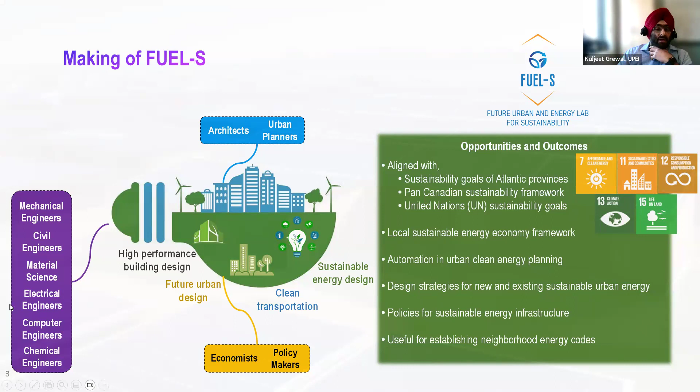So these are some of the things, and this is the vision of my research lab: real life adoption of sustainable energy infrastructure, promoting clean energy storage, economic and environmental goals, attaining energy security and affordability. These are some of the things we are doing.

We are dealing with energy efficient mixed use buildings. By mixed use, I mean whether it is residential, commercial, institutional, what sort of building is it. And then energy oriented urban planning, how we can do urban planning from the energy perspective, and how we can mix different energy resources together.

And then mixing synergy between existing and new neighborhoods. The space of energy is so dynamic - every day new innovations are coming up and the field is so dynamic. So we are also adopting all those new energy resources as well.

Weather uncertainties, we are quantifying that as well. Techno-economic, social uncertainties, local energy economy, and co-creation - we are insisting on co-creation because net zero transition is not only attained by research. Ultimately we have to engage the community in the journey from an early stage, and I will be talking about it. That ultimately fosters a living lab kind of culture that we are developing here in PEI.

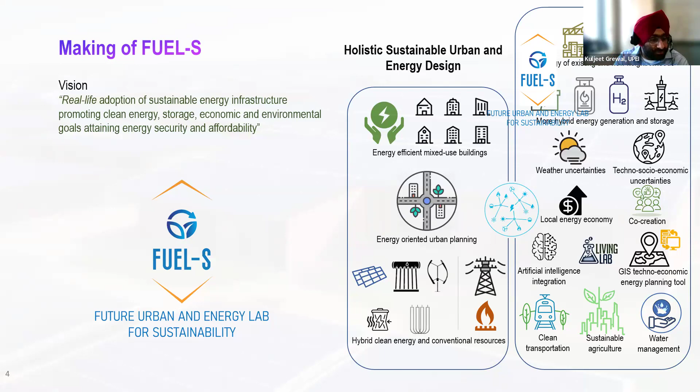We also did one project on clean transportation as well. Water management is also going forward as an overarching goal, and one project is running on sustainable agriculture. So this is the overview of the group activities, that is what we are doing.

Specifically, one of the major focuses is on urban scale sustainable energy design. I'm going to talk first about what this means actually.

When we consider any building, whether it is residential, commercial, institutional, or industrial, these are some of the key aspects when it comes to energy demand profile. The energy demand of any building will depend on the shape of the building, layout of the building, the energy system you are using - whether heat pumps, oil furnace - what sort of energy system, and whether the building is new or existing, because that will govern the building envelope, like the wall insulation value, roof insulation value, and the type of use.

For sure, the energy profile will be different for a residential building versus a commercial building - the profile of energy consumption. And then the facade design - facade is the envelope or outdoor surface of the building. What type of facade design is there, what type of windows and doors are we using? So at building scale, these parameters will affect things.

For example, if you want to attain a net zero energy building, then primarily you will be considering all these aspects, and then you will plan your sustainable energy resources or sustainable energy decision making accordingly.

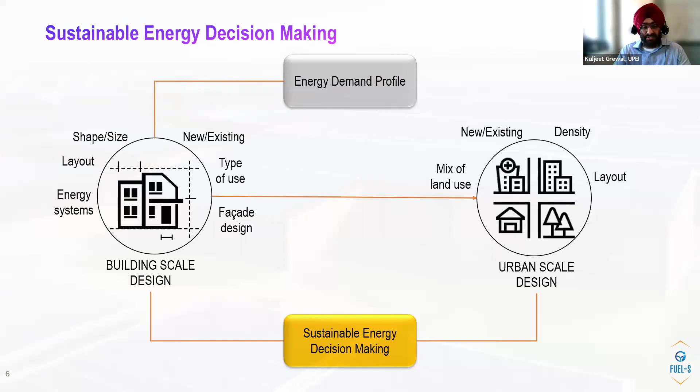What is the density of buildings? This refers to whether our neighborhoods are scattered or more densely populated. For example, downtown would be a perfect example of a densely populated neighborhood, while some suburban areas are more scattered or low density. This will also impact energy demand profiles.

Then there's the layout of the neighborhood. For example, if most buildings are south oriented, or have big windows facing south, those buildings will be heated with solar energy, reducing energy demand. So consider a street layout and how buildings are organized or situated with respect to that layout, whether north, south, east, or west orientation. That will also impact energy performance.

In a nutshell, at the urban scale there are a lot more variables, but there's one advantage. When considering building level energy planning, you're looking at limited energy resources—maybe you can only install PV or solar thermal on rooftops, or have local energy storage integrated with the grid. But at the neighborhood scale, or when considering a cluster of buildings, you can diversify these energy sources further. For example, you can consider wind energy, which isn't feasible at the building scale, but becomes an option at the cluster scale.

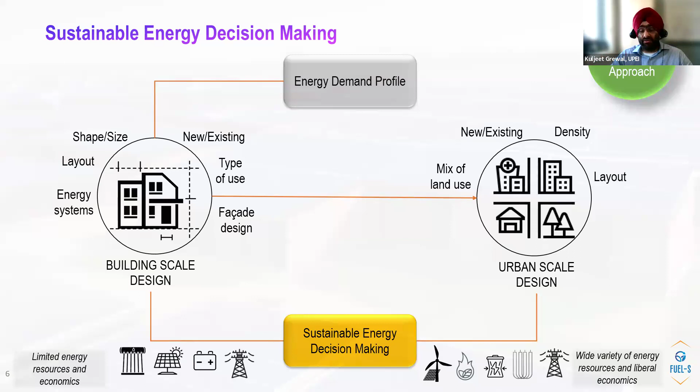So in a nutshell, the point is that whenever you go from building scale to urban scale or bigger, you have a lot more choices of energy resources, and also more liberal economics.

What I mean by liberal economics—this is from a recent report published in 2020 by NREL, the National Renewable Energy Lab in the US. They compared the cost of various solar energy solutions. For example, if you're only considering it for a residential building, if you own a building and put solar on your rooftop, this is the cost you're looking at.

If you come to utility scale or bigger, when considering a building stock or multiple buildings, the economics are much more liberal—almost less than half the cost you'd incur at the residential scale. So by enlarging your scale, you ultimately get less cost for your energy installation, making the economics more liberal for implementing clean energy solutions.

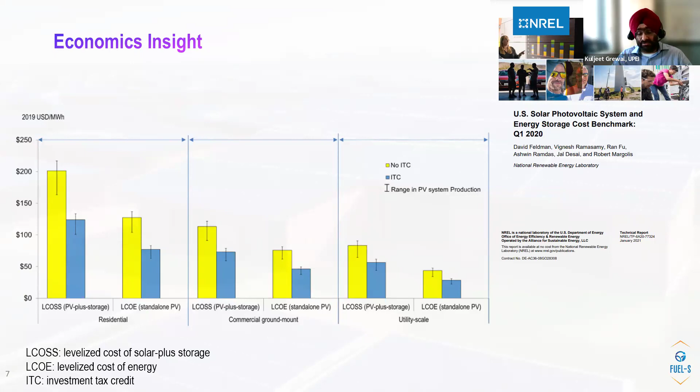So these are a few sustainable urban design objectives. The first objective is energy efficiency of buildings and their systems—this is the primary thing. Often when we hear about net zero, we think about solar energy, wind energy, or bioenergy, whatever generation method. But it's not only about the generation side of things.

We can generate energy for sure, and it should be clean. But at the same time, we have to ensure our buildings or built environment are efficient enough so we're not pouring heat into a house that's leaking heat or has poor insulation. All the heat we dump in would otherwise be lost.

So the primary thing is to make our buildings efficient first. We can do that by using a high performance building envelope, better insulation value, and incorporating passive design—similar to what I discussed before, like having a south facing window in the house to heat it with solar energy.

For instance, in my house, my living area has a big window facing south, and in the afternoon we never turn on the heat pump on a sunny day, because it's more than enough to heat the space while the sun is shining. This way we can cut down the cost—it's not only about active generation—and we can have efficient mechanical systems like heat pumps.

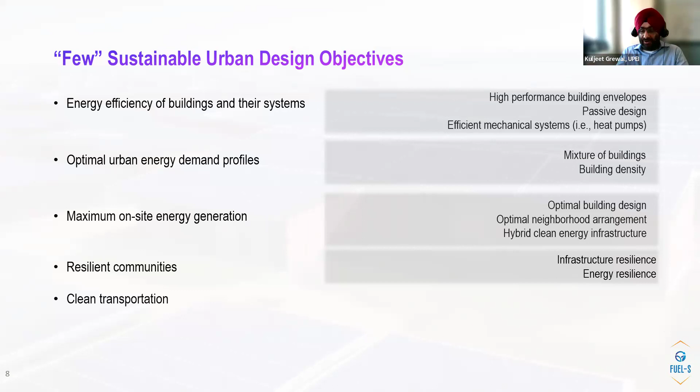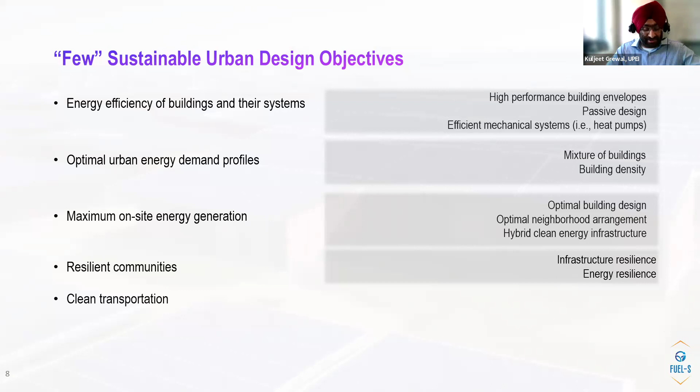And then resilient communities, energy resilience and infrastructure resilience. This is pretty important for Atlantic Canada, especially when we are experiencing a lot of extreme events, like we had Fiona last year, which was devastating with all the power outages. In some areas in PEI, we lost power for around 3 weeks, and it's pretty substantial to manage our day-to-day life activities. So energy resilience and infrastructure resilience is also one of the key aspects.

And then low emission transportation. EVs are there, but EVs are not the sole solution for transportation. There should be alternative methods, like Toyota working on hydrogen engines, ammonia being seen as fuel, or also ethanol and other alternatives. So it's not only about EVs, but diversifying in that space as well.

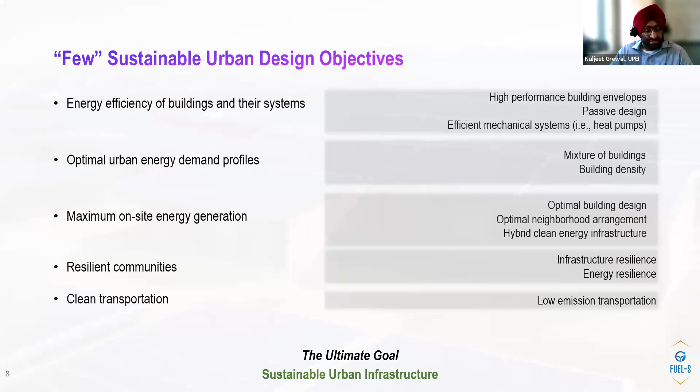So the ultimate goal is sustainable urban infrastructure. Whatever feeds into sustainable urban infrastructure has to be tackled to achieve net zero. Specifically for building stock, when we are considering buildings, there are several variables that can influence the energy of your home or any building.

For example, building envelope performance. The envelope is all the outer elements of your house, like your outer walls or your roof. Your windows and doors are also building envelopes. How insulated your walls are will affect your building performance, and whether you have double glazed, triple glazed, or single glazed windows will impact your energy performance.

And then there's detailed geometry, location, and orientation. As I was talking about, what is the orientation of the building, what is the floor area, whether you have 2 floors, 3 floors, or a single floor. All these things will matter.

And then operational profiles, how you are occupying the building, as I was comparing commercial buildings and residential buildings. So what are the operational profiles, how you are consuming and generating energy, what HVAC system you are using for heating, ventilation and air conditioning, what sort of ventilation, and internal gains like what appliances you have. For example, if a computer is running right now in my office, that's an internal gain.

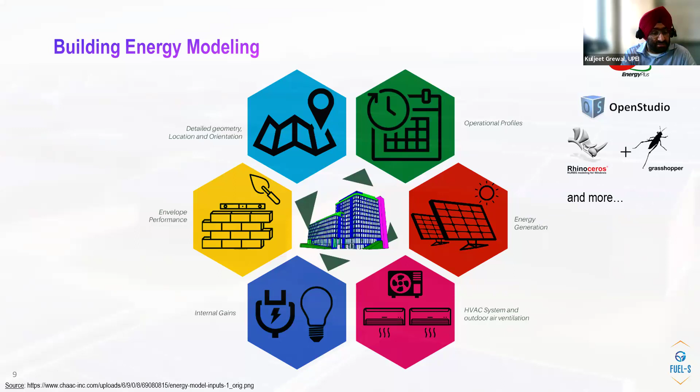Then there are other software packages like OpenStudio, also from NREL, and Rhinoceros Grasshopper, which is also a very good tool that is recently popular in this space. There are for sure more tools out there, but these are some of the key tools in the space of building energy modeling.

So why building energy modeling? Building energy modeling has multiple benefits. It can be used for policy analysis, financial incentives, retrofitting. From energy modeling you can easily see what sort of retrofitting your building will be needing, predictive control, maintenance, and code compliance.

So now NECB, National Energy Code for Buildings, is out there, and you can check whether your building is complying with that code. Asset rating is there, architectural design—these are multiple benefits.

LEED is also one of the benefits. LEED is kind of a certification, Leadership in Energy and Environmental Design. Most commercial buildings are interested in having this certification since it can increase asset value, and they consider a couple of sustainability parameters, so energy modeling can feed into that LEED certification process as well.

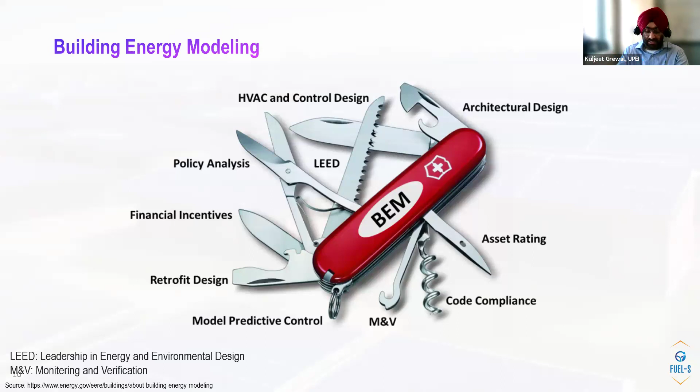Now I talked about building energy modeling for one building, where we're setting up parameters like envelope or energy system. Now when we increase the scale to a neighborhood—let's say you have single detached houses, a primary school, a small restaurant, standalone retail, a supermarket—this is a mixed-use neighborhood, as we typically call it in architecture or urban planning, where you have different building use or land use.

In this case there are a few challenges. Now that you've increased scale from a building to a neighborhood, it's more complex to set up and more time consuming. You're taking too many parameters into account—maybe one building will differ from another. For example, the insulation value of one building won't be the same as your neighbor's, right? So there will be a lot of variability in the building stock you have to account for.

There's also a lot of schedule variability—maybe some people work night shifts, some work day shifts—especially with residential buildings and energy systems. So there's diversity of energy systems: some use wood-fired heating, some use furnace oil, some use heat pumps, some use electrical water heating, some use oil or propane water heating. There's so much diversity in energy systems, and the internal loads will also be different.

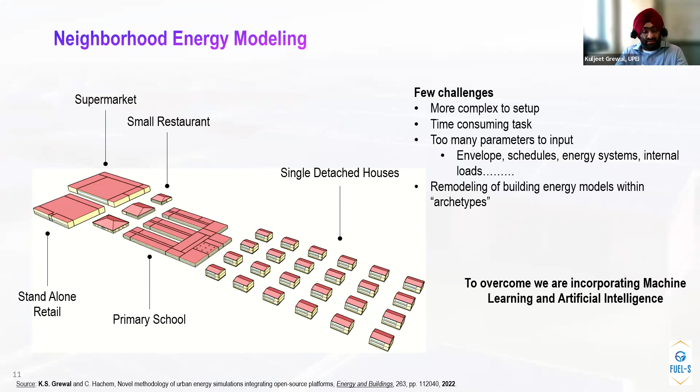That's why in our field we are incorporating a lot of machine learning and artificial intelligence. I want to automate this process down the line so that modeling can be done at a faster pace for net zero transitions.

This is one example we recently completed, published in a reputed journal of energy and buildings in our field, where we developed several archetypes of buildings. We coupled different tools like SketchUp, Energy Plus, MATLAB, and Python together to automatically create 3D models of buildings or set up 3D energy models.

So first in this method, we individually set up building energy models, then feed them into this algorithm, which takes all those energy model files and merges them together to create a neighborhood energy model. Although I'm describing it in simpler terms, merging is itself a very complex task because of the variety of variables involved. Anyway, to tackle this problem we built this algorithm, and it works pretty well.

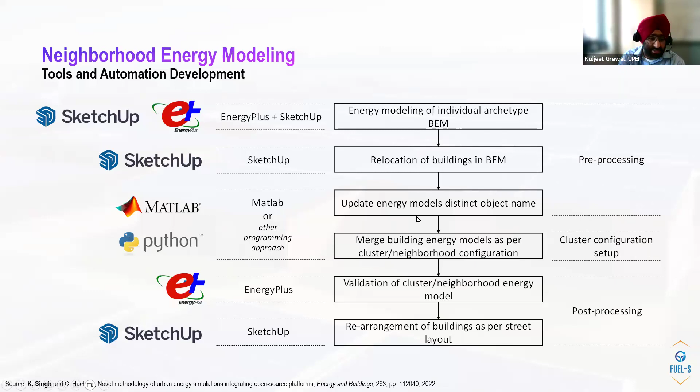And then this is the mixture of buildings that I was talking about. So for example, here in this study, we have studied how the mixture of residential buildings will impact the energy performance. So in Canada, primarily, we are having three types of buildings: single detached, townhouses or semi-detached houses. All the townhouses are a little different, but in this study, we have considered them in the same space. And the apartment buildings. So these three are the main types of buildings that we are having.

And then what is the commercial to residential floor area ratio? So in this particular study, we have considered a mixed use neighborhood where partly the neighborhood is developed as residential and partly it is developed as commercial. And then what is the unit density index? Like how many units are there per acre of land or per hectare of land.

And then these are the performance parameters that we have considered. We have considered net electricity consumption ratio of performance, like what we are generating and what we are consuming. And then we have assumed PV generation as well in the study on the buildings, and waste to energy. We also considered this waste to energy generation. And then what is the GHG emission that is coming out of this mixture.

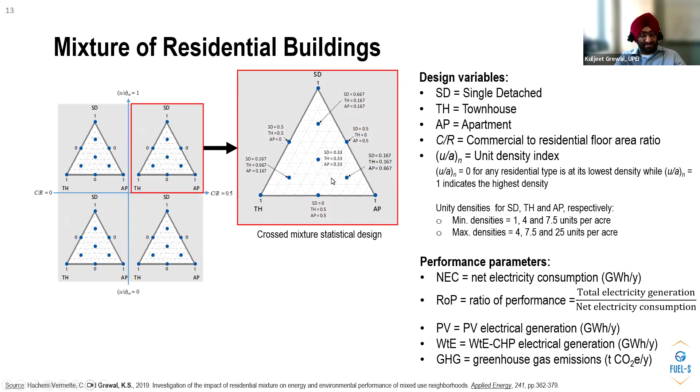For example, here, if we are having 100% single detached houses, here if we are having 100% apartments, 100% townhouses, and in between there will be a mixture of all these types of residential buildings. For example, at the center, there will be an equal mix of each building, basically 33% single detached, townhouses and apartment buildings. And then we have set up a couple of objective functions with respect to these design variables. And then we fed it to a multi-objective optimization engine so that we can see how the mixture will look.

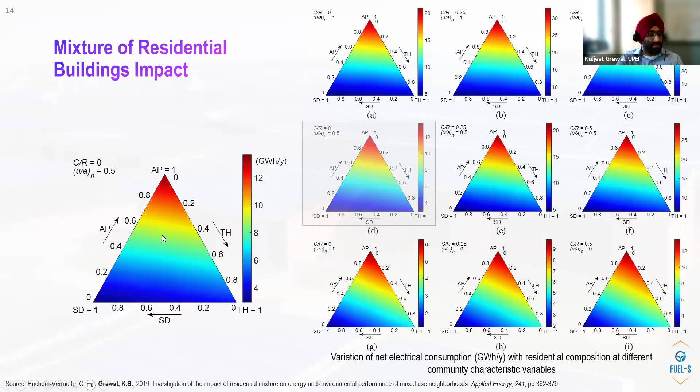So these are some of the results that we got. For example, in this case, you can see how the mixture of different buildings together will impact the energy performance. And this is net electrical consumption; since apartment buildings will be having multiple units, these are more energy intensive units out there. And then whenever we are moving around within this triangle, we can see how the energy consumption will be varying. And similarly, we have done this with commercial buildings. If we are mixing together commercial buildings, how does that impact the energy performance?

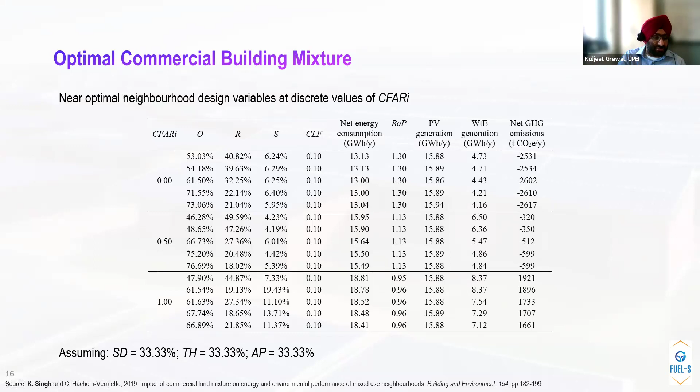And then finally, how we can mix different buildings together, for example, to achieve net zero or to optimize all these design parameters. And so in that way, we can see how well we can attain net zero energy in future neighborhoods. So this is also one of the ideas that we are having, so that buildings can be mixed together to attain net zero.

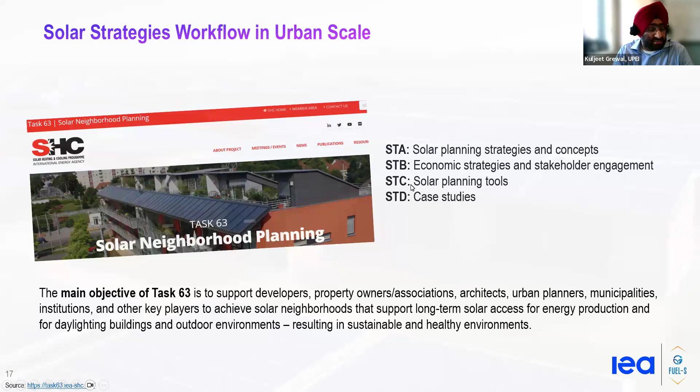This is also one of the pieces of my research, which is towards solar neighborhood planning. This is Task 63 of the International Energy Agency, where we are having different subtasks. So I'm co-leading Subtask A in this task of the IEA. And for Canadian neighborhoods, we have developed a couple of real life archetype energy models. For example, these are two neighborhoods that we selected.

And then we have energy modeled these neighborhoods, and then we have analyzed them from the solar perspective, like how much active solar we can generate, what is the passive performance, and based on that, how we can install solar collectors or do solar installations within the neighborhood. And then we also tried retrofitting these buildings, for example with more insulation and stuff like that. So this is the baseline, 100%. Then how much we can reduce with energy efficiency retrofitting, and how much we can reduce with retrofitting and solar energy generation, basically.

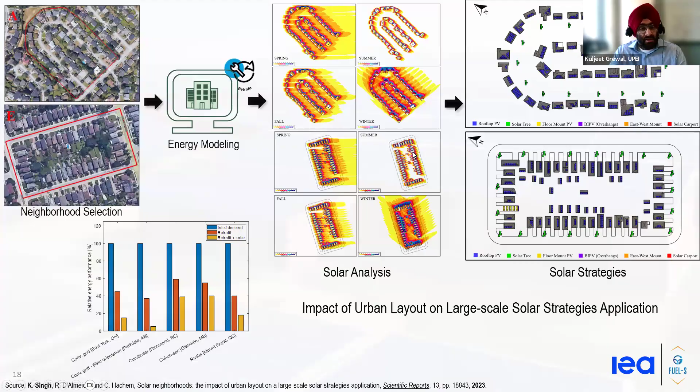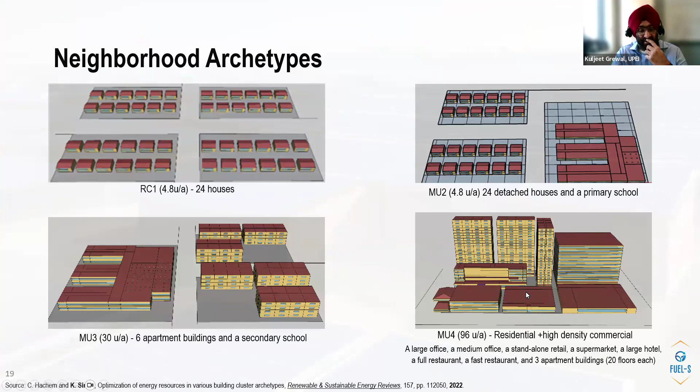Then as part of the task, we also developed a couple of neighborhood archetypes within Canada. For example, here I'm showing residential archetypes, mixed use archetypes, high density archetypes, just like downtown areas. And then we have also used a genetic algorithm to optimize the mix of energy resources. Here we have optimized wind, PV, waste to energy, and grid together, like conventional resources and distributed energy together, to attain net zero energy, basically.

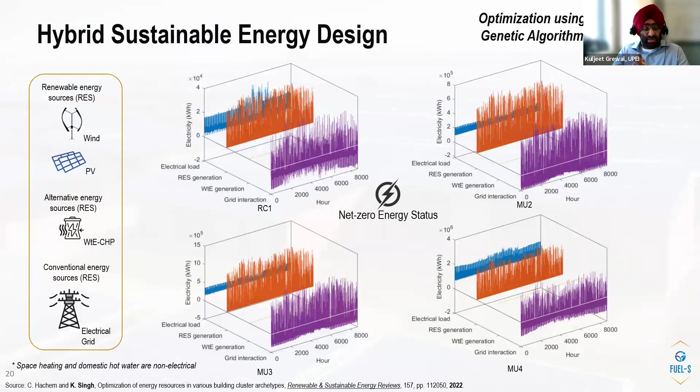And then this is another elaboration on the IEA task activities, but this is not part of the IEA task. We have elaborated this research further, where this is the mixed use neighborhood that we have set up, and then we have quantified its electrical vulnerability. We want to assess the energy resilience of these communities. For example, if some power outage has happened during some extreme event, how energy vulnerable are those net zero neighborhoods? How much solar energy we can generate, how those neighborhoods can survive, basically.

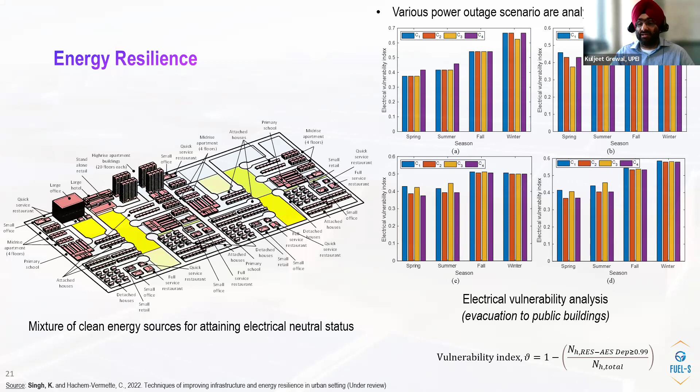So this is also a perspective, and we have set up a vulnerability index, and based on that index, we have quantified different neighborhoods in different seasons and how they are vulnerable. And then we can take this vulnerability index and try to optimize the design of our hybrid energy infrastructure to minimize this vulnerability. That is also one of the pieces that we have done.

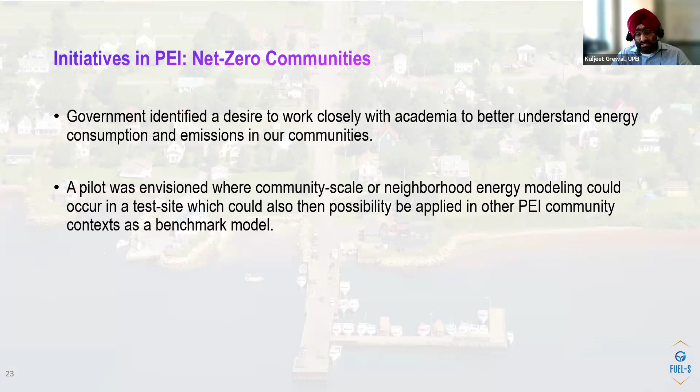So coming to PEI, in PEI also we are having a number of initiatives. One of the initiatives is the project that I'm going to touch on briefly today. But overall, the province wants to attain net zero by 2040, and there are a couple of initiatives, a couple of funds, and a lot of exciting things are going on in the province. So the government also identified a desire to work with academia to better understand energy consumption and emissions of the communities. So this research is part of the community energy planning of Prince Edward Island.

And so they reached out to us, and then we planned this project on Georgetown, PEI. It's a small town here in PEI, having around 300 buildings, so it is a scaled size. This project is on assessing the potential of PEI's first net zero community. That would be potentially Georgetown. And this project kicked off on October 5th. And then this is the overview of the project.

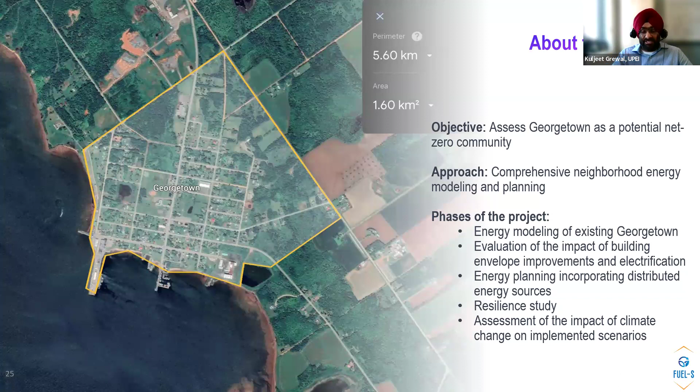Then phase 4 is on resilience study and assessment of the impact of climate change on the implemented scenarios. For example, going forward, if climate change keeps on happening, then what we are designing today may not be sufficient for tomorrow, down the line, 10 years, 15 years, right? So we want to study that as well, how our energy systems will be impacted by climate change.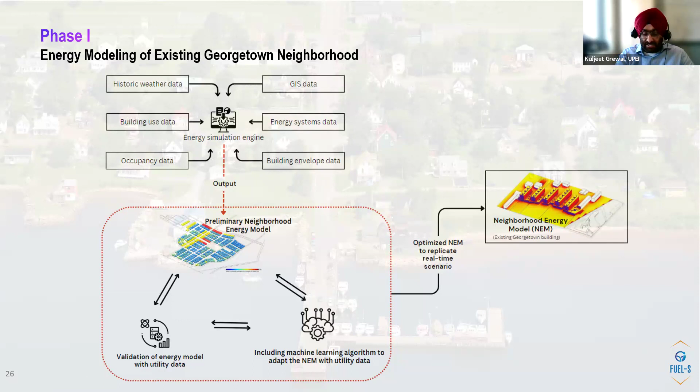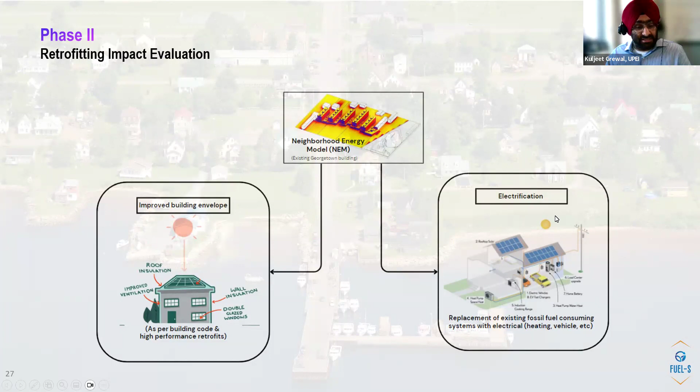So this is phase 1. First, we are getting historic weather data, building use data, occupancy data, building envelope data, energy system data, GIS data. We are integrating all these data sources to set up a prelim neighborhood energy model. Then we will calibrate this model with utility data with the help of machine learning. We want to have a kind of digital twin of Georgetown as a baseline case. And then we will be assessing retrofitting strategies: if we are retrofitting buildings, how much energy we can save, how efficient buildings can be, and what is the impact of electrification as well.

So I'm very proud to announce that we are on the path of fostering Georgetown as a living lab. Why is it a living lab? Because it's a real life context, and we are collaborating with the community, with government actors, with private partners, and ourselves, an academic institution. We are having a lot of community engagement. Till date, we had 3 sessions in the last 3 months. We have a couple of volunteers in the community as well. We are collecting real life data. And of course, scientific research is one of the pieces in the project as well. So that's why we are now co-creating a net zero community in Prince Edward Island, and it's a living lab.

So we are involving people in data collection as well, so I will be touching that up as well. So this is the research progress till date on this particular project.

So we are playing with LiDAR data from the province. LiDAR data is a laser data that is collected from an aircraft. It is a very scary kind of data set if you look at it, but you will be having a lot of points of all the surfaces on ground. So we are processing all that LiDAR data, and now we are able to attain an LOD2 model, level of detail 2 model. So this is the model that we have developed from LiDAR data.

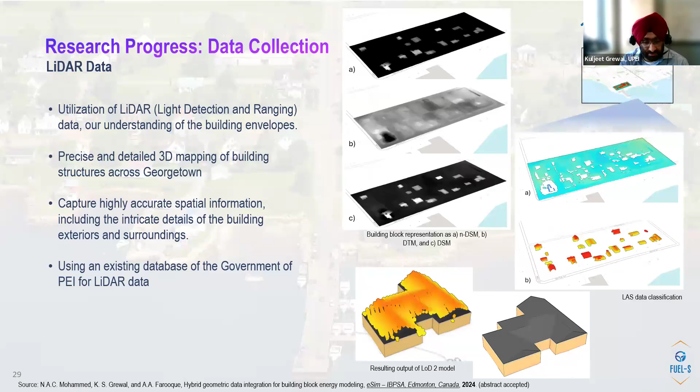So to tackle that problem, we are flying our own drones in the community as well. We are processing that data with machine learning. We are labeling that data, and then we are deploying supervised machine learning to detect windows and doors. Then that data will be superimposed onto the LiDAR data model that we have developed, that you have seen in the previous slide.

So from that, we are envisioning to automate this process so that you are only inputting LiDAR data and a couple of images of the neighborhood. Then it would automatically generate 3D neighborhood models for you. Right now, people are doing this process very manually, but we are heavily automating it. And this is not only relevant for PEI, but for the whole world.

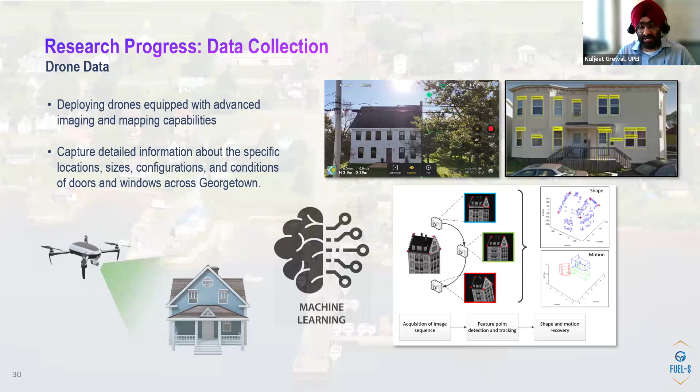One of my colleagues from Norway, who is also working on the IEA task, wants to use this technology to develop 3D building models, because right now the process is pretty much manual. We are also having building envelope data from NRCan, Natural Resources Canada, and recently we started browsing this data, because NRCan is also doing energy audits through their EnerGuide program.

From this data, we discovered that there is a lot of variability in envelope characteristics. For example, this is your wall insulation value, and you can see that from the year of construction, you can't really assume an insulation value, because there was no building code followed in PEI before 2020. So due to this variability, we can't just first identify the year of construction and then assume the insulation value.

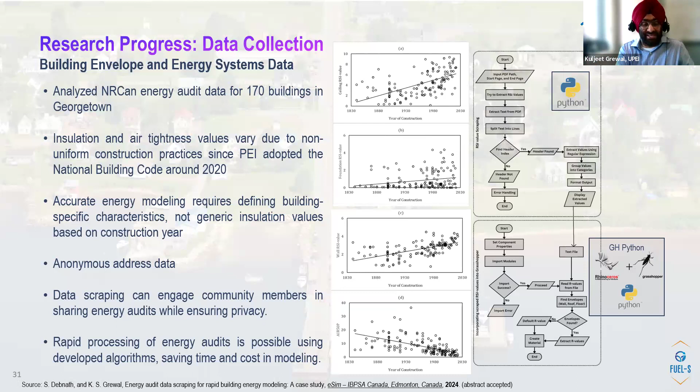So that's why we plan to diversify this building envelope characterization process. For that, we are using energy audits from NRCan. Another problem with the energy audits is we don't have address identities in that data, so we don't know which building. In that energy audit, you will see insulation values and what the energy system is, but you can't see the address because of privacy. They are not sharing that data with us, so that data is anonymous.

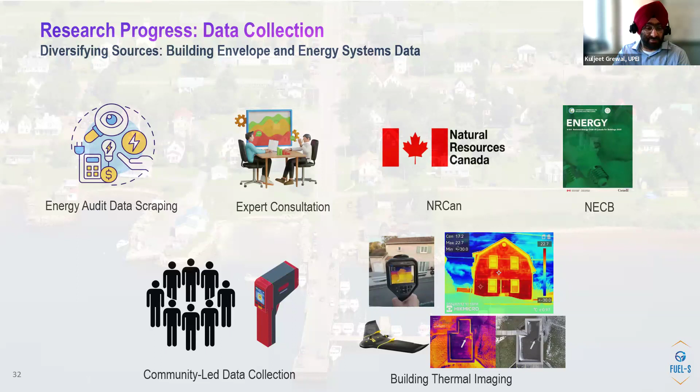And then we are doing expert consultations. We are using the National Energy Code for Buildings. Then recently we launched this community-led data collection. We thought, why can't the community collect their own data and then report back to us? So we recently launched this initiative. And we are doing building imaging as well: overhead imaging, outdoor imaging, thermal imaging. So this is the community-led data collection.

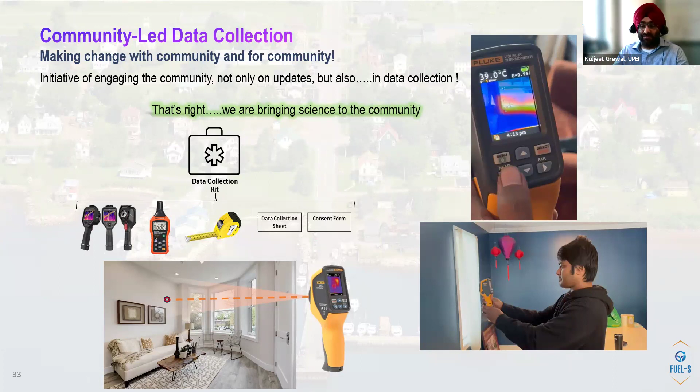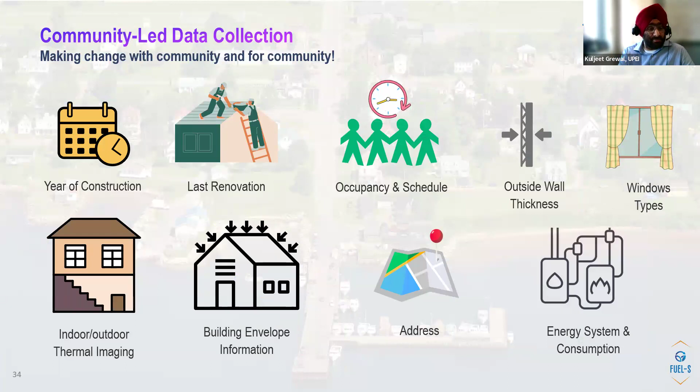We have set up a few kits with infrared cameras, hygrometers, measuring tape, and data collection sheets. People can take these kits and take some thermal imaging of their outdoors and indoors. Then they report back to us, and we can collect and process that data to estimate the insulation values. This is the data we are collecting: year of construction, last renovation, occupancy and schedule, outdoor wall thickness, window types, indoor and outdoor thermal imaging, building envelope information, addresses, energy system, and consumption. So it is a pretty comprehensive study that we are running.

These are the pictures from the community training session, where we trained people. Recently this got captured by CBC, and one of the community members said it was eye-opening for them to see how the heat is being lost from their home. So this sort of initiative is not only feeding us data, but it is also creating awareness in the community of how they are using energy and how the energy is leaking.

We also have a couple of community champions who are helping us in this community-led data collection process. Until date, yesterday's number was around 140. So we have covered 140 buildings with this community-led data collection.

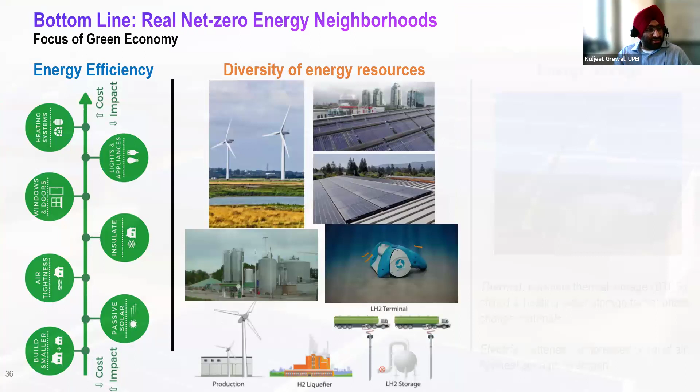So in a nutshell, what is the bottom line? Going forward, we have to improve the energy efficiency of buildings. So first, we have to conserve our energy. Then we have to diversify our energy resources. It is not only solar, not only wind, but as much diversification as we can have.

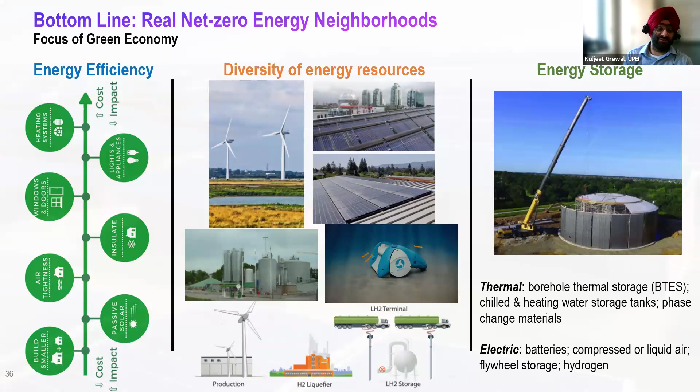Energy storage is one of the important aspects of a net zero future, because all those renewable energy resources are non-programmable. Like you can't really control wind, you can't really control solar, right? So to ensure energy resilience of communities, you should be having energy storage as well.